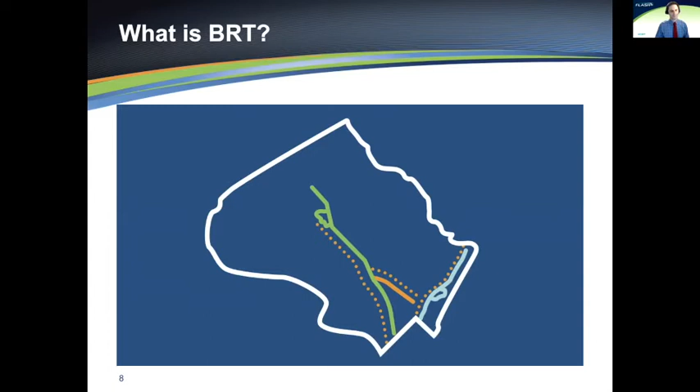BRT, Bus Rapid Transit, a comfortable, reliable, new transit option for Montgomery County. BRT will have new walkways and stations where you can wait comfortably, view real-time travel information, and pay your fare before boarding. BRT's reliable service keeps you moving with features like green light priority signaling. BRT is a new type of vehicle, like a train on rubber tires, often having its own lanes on busy roads with fewer stops so you can get where you need to go quickly. BRT vehicles have Wi-Fi and power outlets so you can get a head start on your day during your commute. Riding BRT gets you out of traffic. One BRT vehicle can take up to 90 cars off the road. More BRT riders means less traffic, and less cars on the road means a better commute for riders and drivers. BRT is good for business because it not only gets workers to their jobs, but attracts new jobs and business along BRT routes. BRT is cost-effective. It uses the roads we already have and adjusts them to make room for BRT. BRT is in cities across the U.S., including right next door in Northern Virginia. BRT, a smart new transit option for Montgomery County, making trips around the county more comfortable and convenient, leaving you more time to do the things you enjoy. Get on board BRT.

Great, so let's jump right in. Just to reinforce some of the elements you saw in the video, what is BRT? It's a comfortable and reliable transit option we're proposing for Montgomery County. Bus Rapid Transit uses the existing street, and oftentimes we try to give it its own lane on busy roads so it can bypass congestion. It makes fewer stops than the existing local bus network so we can speed up the service. Just a couple updates on where we are with bus rapid transit in the county: the US 29 Flash project, operating on the Colesville corridor between Silver Spring and Burtonsville, just opened yesterday, so we're pretty excited about that. If you get a chance to travel the US 29 corridor, take a look at the stations and buses, or take the service yourself.

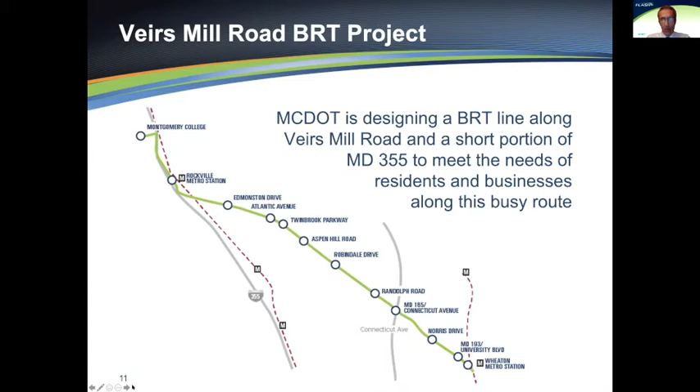As Corey indicated, the BRT will use the existing roads where there are available shoulders, or in some places we have or will facilitate using existing right turn lanes or dedicated lanes that the BRT will use. In other places, it will be sharing the traffic on Veirs Mill Road and 355 with the rest of the traffic. Next.

Hopefully you're seeing the images that are moving as the introduction video, as Corey indicated. Right now we are looking at service intervals, the bus intervals during rush hour in the morning and afternoon, to be somewhere between 5 to 10 minutes, and in the non-peak hours every 10 to 15 minutes. We will use what is called TSP, or Transit Signal Priority, at 9 of the intersections.

What TSP is: as the bus is approaching the intersection, if the traffic signal is already green, it will tell the traffic signal, hey, stay green a few more seconds so I can get through. Or if the signal is already red, it will tell the signal, hey, can you turn green a little bit sooner, so kind of speed things up for us. But I want to stress, this does not affect the total operation of that intersection or the whole corridor, and it is not the same thing that ambulances or fire engines, the emergency vehicles, use.

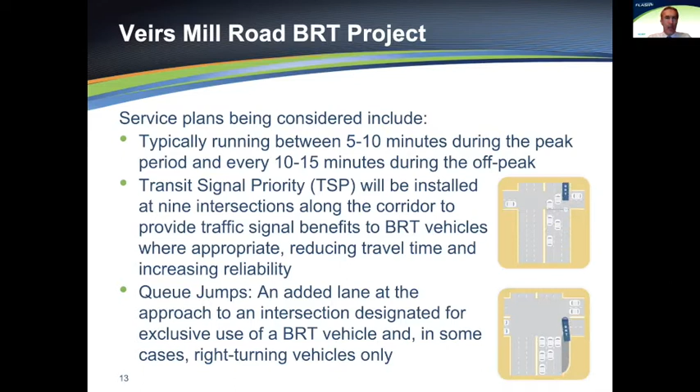Next slide. Where we are at in the project schedule: right now we are reaching the very end of planning design, concept design. In our business, we call that 5 to 10% design. By middle of November, we should be done with the preliminary design, the planning phase, the concept design phase. We have already begun the preliminary design, which takes us to the 35% stage. We anticipate we will be done with preliminary design by late fall of 2021, roughly about a year from now. Right now, we are not funded for final design or construction.

We are only funded to the end of preliminary design, but we believe we will receive funding to continue on to final design and construction.

If we receive funding, we will start final design in late 2021. It should take about 2.5 years to do final design, and then we will go to construction, which itself would take approximately 2.5 years. So if everything goes as planned, by middle of 2026, the BRT on Veirs Mill Road 355 would be operational.

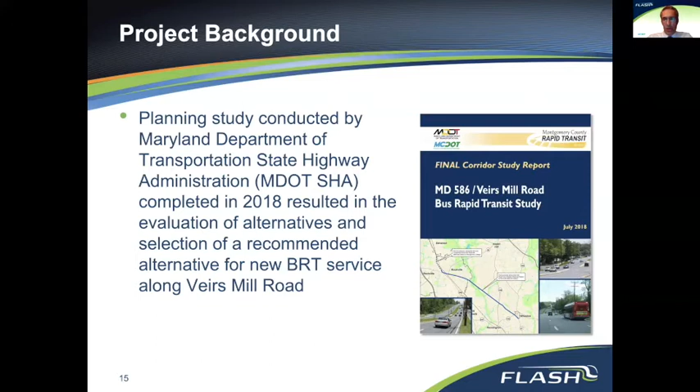The background for this project: it was initially studied by Maryland Department of Transportation State Highway Administration, SHA as we call it. They did a study and finished up in 2018, and they came up with various alternatives and recommendations along Veirs Mill Road.

What that study came up with, among the various alternatives, was alternative 2 and alternative 3. When they were presented to the Montgomery County Council, they opted for an alternative kind of between the two, which we call alternative 2.5. Alternative 2.5 keeps the infrastructure improvements that were part of alternative 2 - the stations, where they are, the number of stations, and the queue jumps - and it keeps the operational improvements, such as how frequently the buses run, from alternative 3.

County council picked alternative 2.5, but alternative 3 has been retained as a master plan, a long-term option that's more robust if in the future there's funding and the need for it, it could be pursued at a later date. The planning, design, and construction of alternative 2.5 is now moving forward by Montgomery County, by us.

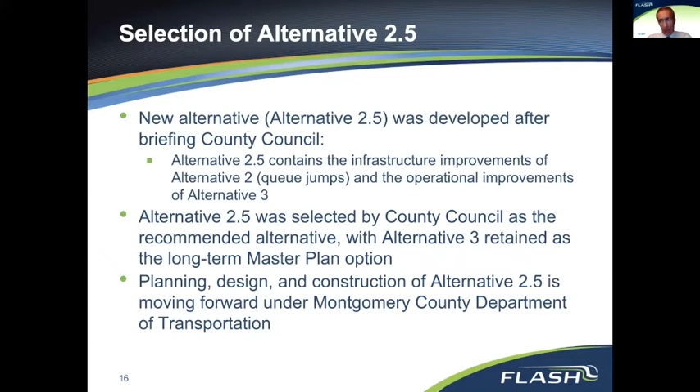As far as the background, the study looked at the BRT stations, the number of stations, their locations, the queue jump locations, what kind of service plans would be offered, the property impacts, the environmental impacts, some forecasting for ridership and traffic analysis, an estimation of the total cost of the project, and finally what we call station access.

I will talk about that in more detail in a few minutes, but basically that is how we get pedestrians or cyclists to each station.

The need for this project: system connectivity. It provides a high quality express connection east-west through the county, a transit connection that currently is not really available between the two metro stations in Rockville and Wheaton. This will do the job very nicely, in fact.

Mobility: right now there is traffic congestion on Veirs Mill Road. Local buses are typically delayed by 15 minutes or more, and all of this causes unpredictable or increased travel times, both for mass transit and for the regular traffic that uses that corridor.

The demand: there is a pretty high transit ridership on this corridor already today. And there are plans, both by WMATA and others, for transit-oriented development at both metro rail stations in Rockville and Wheaton. So this fits in very nicely with that.

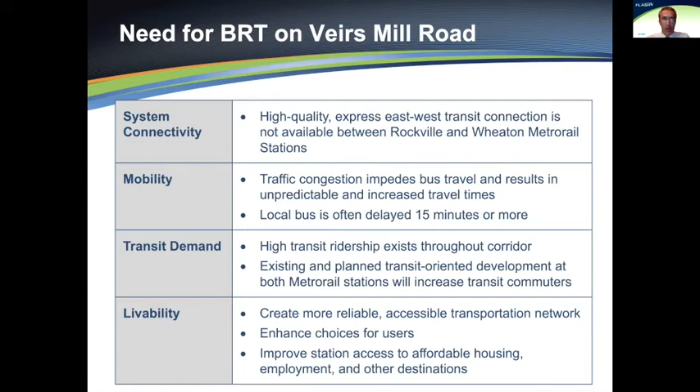The station access that I talked about - within a half mile of each station, we are looking at what improvements we need to make to get people to the stations on foot, or if they are choosing to ride their bicycles. My own term for it is feeders. This is what feeds every station.

To do that, we have looked at various master plans and other studies for pedestrian safety or pedestrian or cyclist improvements. We have sifted through all of those and come up with what fits, what would be a good idea for this project. We have coordinated with agencies within DOT and outside of the county to find out what station access projects we should be looking at.

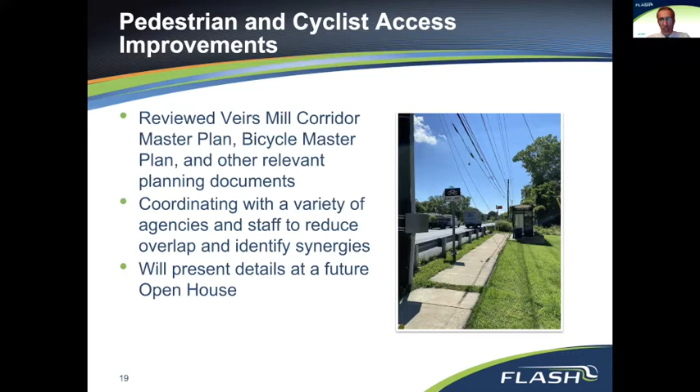But as I said, we are in concept design right now, so this is kind of a bird's eye view. As we are finishing up preliminary design or final design, we will have more robust or detailed information as far as what we are looking at for each station in terms of feeders or station access, and obviously we will present that to you in future open houses.

This is an overall map of the project. I'm going to turn it over to Christine Sutkowski. Christine will go over the station locations and the queue jumps. Thank you, Michael - so I'll just have to share my screen to take a closer look.

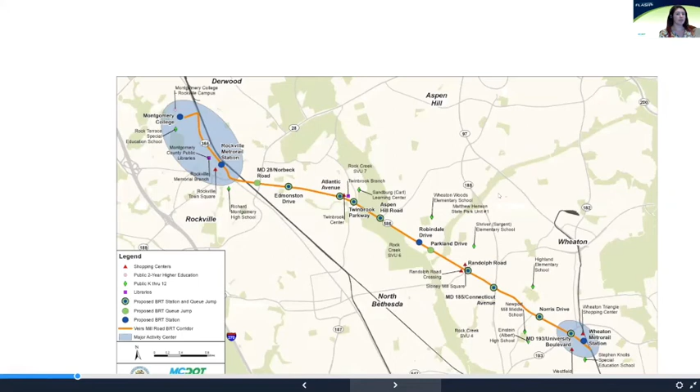This is the overview map that Michael was showing of the project corridor. The proposed flash bus route is shown in orange, traversing the entire length of Veirs Mill Road and that short segment of Maryland 355. As Michael mentioned, it's a total length of approximately a little over 7.5 miles, going from Wheaton on the east end to Rockville on the west end.

The dots shown on this map represent either a proposed station location, shown in blue, or a proposed queue jump location only, shown in green, or a location with both a station and queue jump improvement, shown in blue and green.

For those who may have attended the open houses about the Veirs Mill BRT planning study a few years ago, which Michael mentioned, you may notice that a few of the proposed station locations have changed based on further evaluation and comments received during that time.

There are 12 proposed stations located along the route and 2 standalone queue jump locations that allow the bus to bypass traffic congestion and move more quickly.

The BRT stations are spaced about three-quarters of a mile apart on average, and I'm going to walk through the current BRT station and improvement locations by zooming in and out of this map. Then in a few minutes, Michael will describe the station features and the look of the BRT stations shortly.

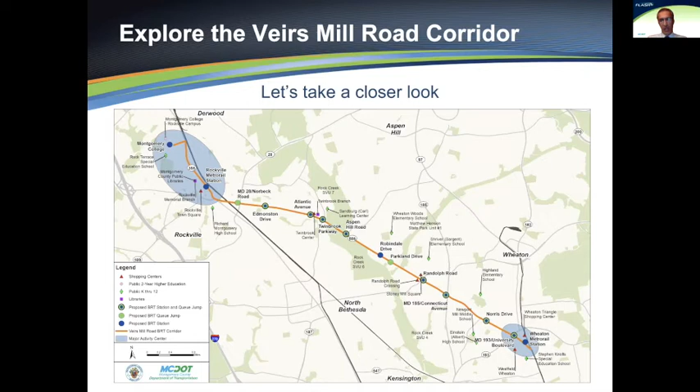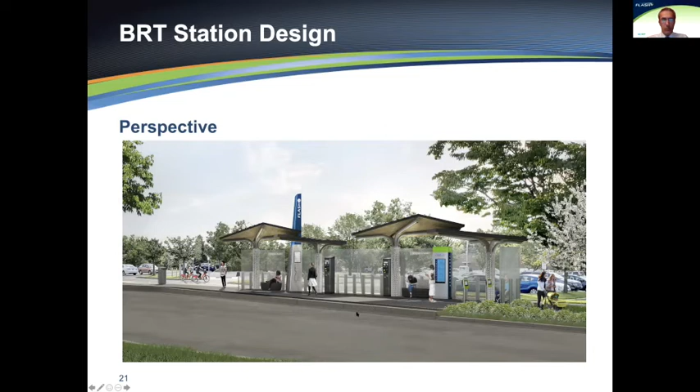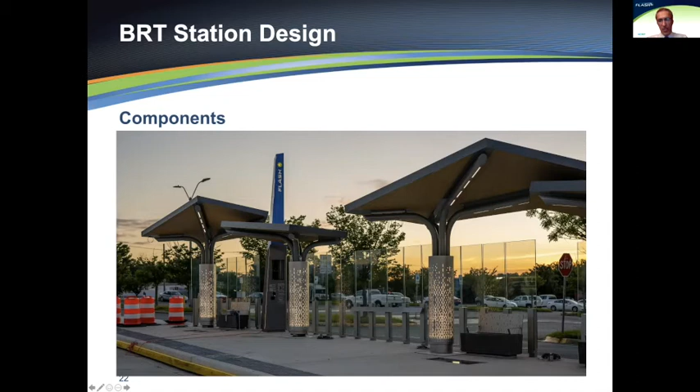Michael, before we get into the benefits and costs, there's a question from Mariela Garcia Colberg. She's asking how MCDOT is going to deal with enforcement issues, such as preventing cars from entering dedicated sections or bus lanes—she knows DDOT has had some issues with that.

Well, I'll make one thing clear: the Department of Transportation itself is not in the enforcement business. We work closely with our colleagues in the police department. This happens in other jurisdictions and we're aware of it. Some people think they can sneak into the rightmost dedicated BRT lane for a few seconds then jump back out. But if this becomes a pattern or habit, we can coordinate with the police department. Once we opened up US 29—which doesn't have as many dedicated lanes—and once we open up Veirs Mill, if this becomes an issue, technology has improved so much that we can use cameras or other monitoring systems to keep track of this and take action. I hope that answered the question, so I'm going to move on.

As far as the project, we forecast that in 2040—roughly 20 years from now, or 15 years or so from when it opens—there would be 6,400 boardings, with more than 40% of those being new ridership, new boardings. This will improve transit reliability. The dedicated lanes I talked about, and that Christine covered in her presentation, along with transit signal priority and queue jumps, all boil down to providing more reliable and faster transit service, which in turn will also improve travel times for cars and trucks on this corridor.

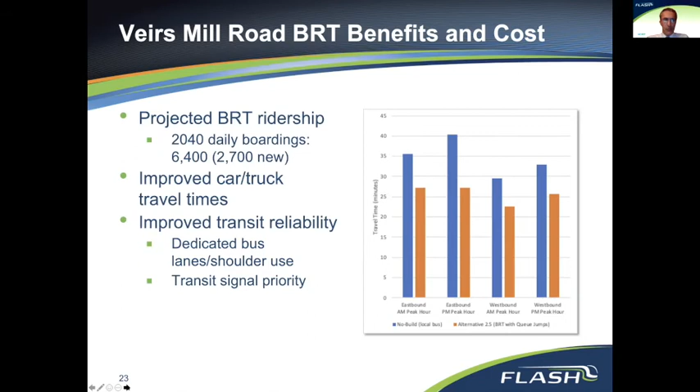I'm not going to go through each number individually, but overall, to design this project and acquire the needed right-of-way and buy the necessary new buses, the total price tag right now where we are at the planning stage is about 76 million.

We forecast right now the annual operating budget will be just shy of 4 million each year. Obviously, as we get into...

preliminary design and especially final design, we will have more accurate and detailed numbers, and we will update that. But right now, we feel pretty comfortable with these numbers.

As I mentioned, US 29 just opened, so we used some of the numbers, like the bus costs, the cost of each bus, from that study for our project.

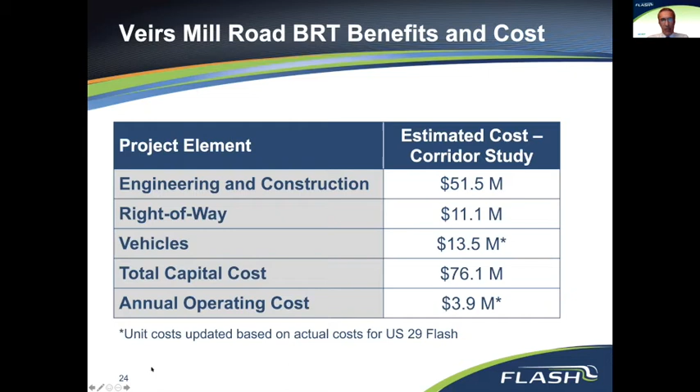Michael, if I can interrupt, we have another question about the actual operation or service. Joanne Bellamy asks, will BRT cause a reduction in the buses currently servicing the Veirs Mill route?

And if so, what are you going to do to ensure adequate service availability remains, since there are numerous seniors who rely on current transportation and won't be near a BRT boarding station?

Well, that's a very good question. Actually, one of the things we will be looking at is coordination with all the existing transit services, especially those coming from what I call side streets, but definitely what's on this corridor today. Yes, we will coordinate very closely.

We are already coordinating closely with our colleagues in the transit division with Ride-On and so forth to ensure that we actually improve the transit service on this corridor and don't cause any issues for people.

But as I said, this is something we will look at much more closely in the next design stages than what we're doing today. We are only at concept or planning design stage today.

As far as the next steps, as I mentioned, we are in planning or concept design. I anticipate that by the middle of next month, middle of November, we will finish concept design.